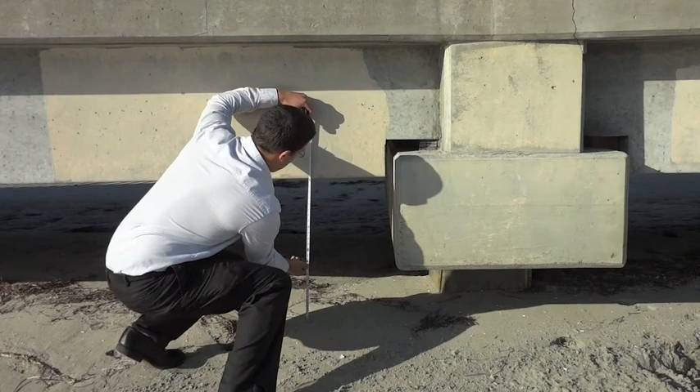Roughly 80,000 people, civilians and military personnel alike, cross the Coronado Bay Bridge on any given workday. Of that number, an estimated 34.5 thousand are military personnel entering NASNI. The road behind me is 3rd Avenue, the main arterial into the base.

Due to the security checkpoint on the base and the traffic signal at the intersection of 3rd and Orange, this vital artery backs up all the way onto the bridge, causing severe traffic congestion for the entire area. The level of service for this road operates at an LOS of F, where it should be operating at an LOS of C if the military personnel were off. This is the primary reason why a new connection must be built, to alleviate the congestion on the island and give this quiet city back to its people.

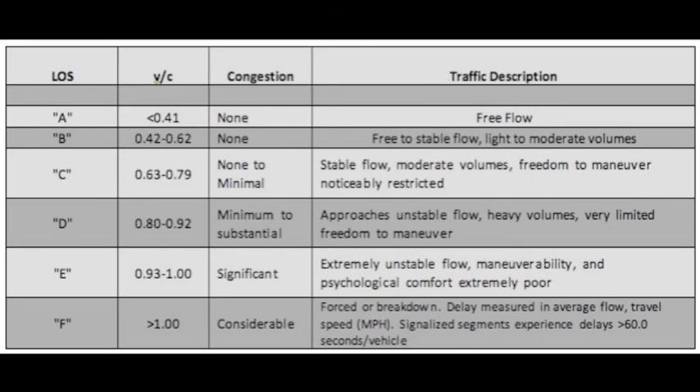After examining all of the surrounding issues and the traffic concerns for several locations, our team has determined that a tunnel design would satisfy all the needs at the expense of a larger price tag. The tunnel will be roughly 15,000 linear feet and will begin at Washington Street, right here, adjacent to the 5.

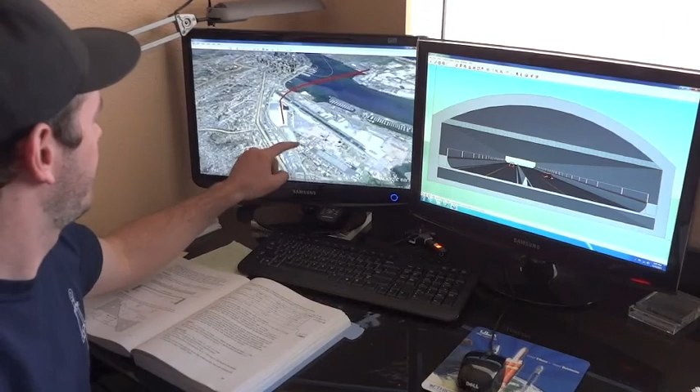It will then travel underneath Lindbergh Field on the landing strip and will travel underneath the bay along this path, coming up parallel on Rogers Street at the intersection of 282 and Rogers Street.

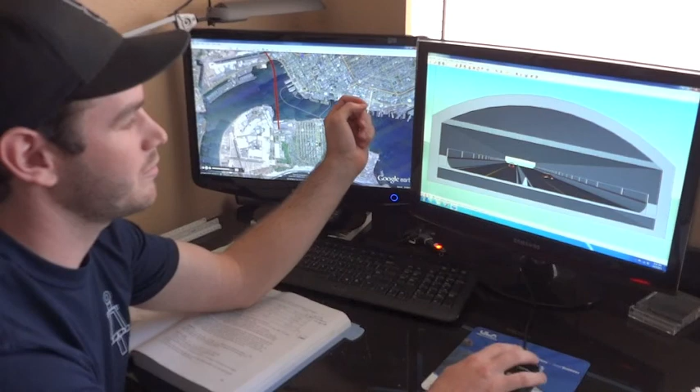The NASNI cross-section will consist of 5 lanes and will be 89 feet wide, with a type 60 concrete barrier in the center, 2-foot shoulder offsets, 3 lanes going to the base and 2 lanes coming from the base. There will also be an emergency egress of 3.5 feet on each side, and then 4-foot walls on the outer edge.

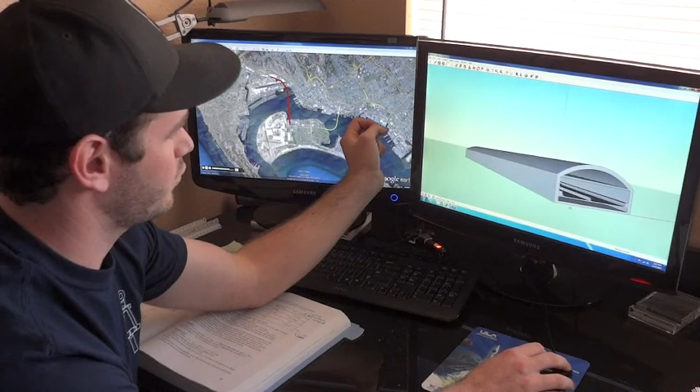This is one segment of the tunnel, and each segment will be roughly 300 to 500 feet long.

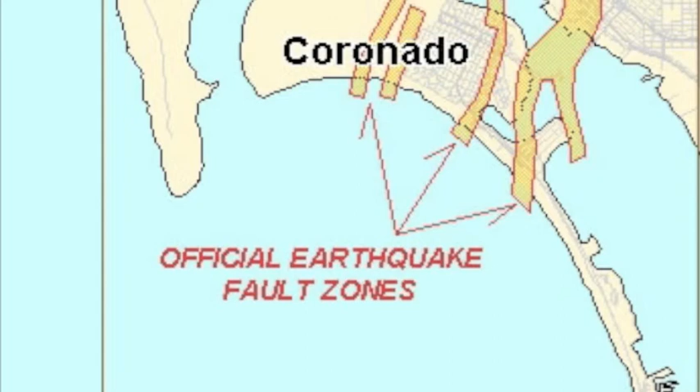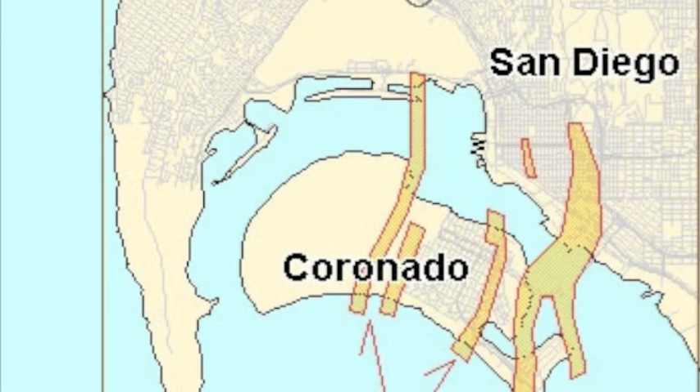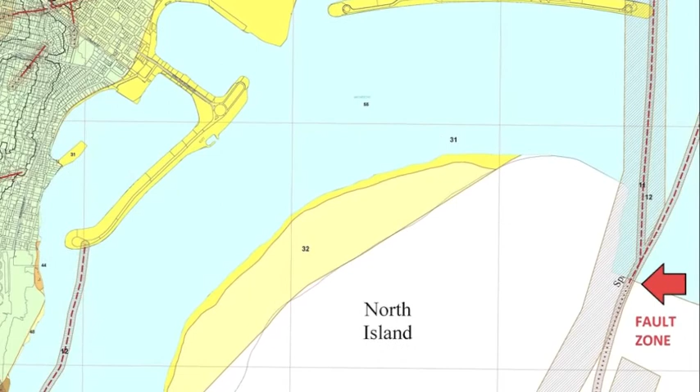Geotechnical constraints of the proposed NASNI tunnel connection mainly arise from the geologic setting of Coronado Island. As you can see in this figure, several earthquake zones cross through Coronado Island at many locations. Specifically, there is the Spanish Bight segment of the Rose Canyon Fault running approximately just west of the tunnel location on the NASNI site, as well as an active fault zone that terminates approximately 200 feet south of the site, designated by the shaded area shown in the figure.

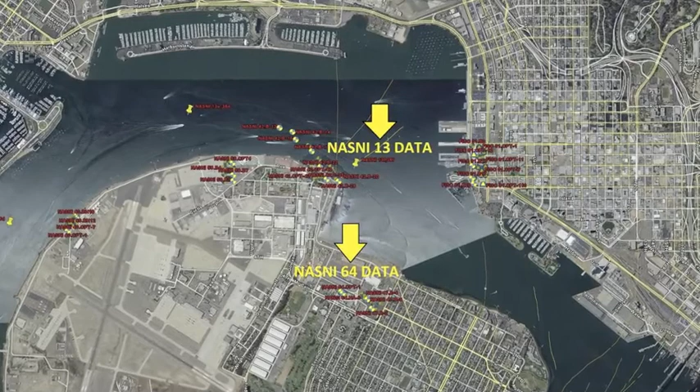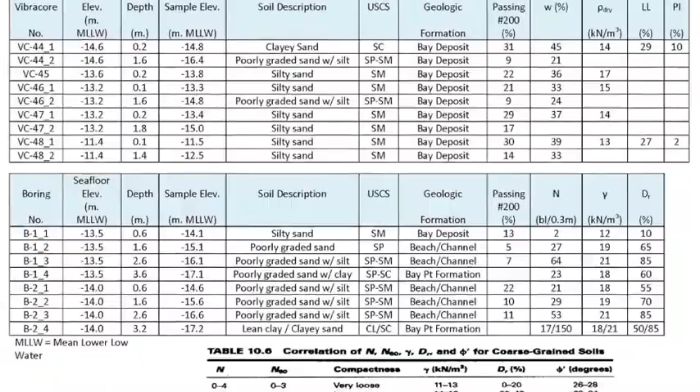The bay soil was collected from the NASNI 13 site by means of several vibrocores and borings. The bay deposits varied from silty to clayey sands and poorly graded fine to coarse sand with abundant shell fragments. A summary of the NASNI 13 soil parameters can be seen in this table.

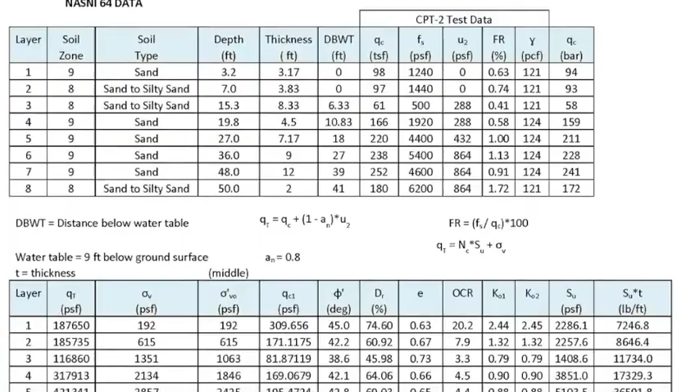The NASNI 64 soil data was collected by means of a cone penetration test sounding to a depth of 50 feet. The soil was typically poorly graded sand to silty sand, and a summary of the parameters used can be seen in this table and in the following chart.

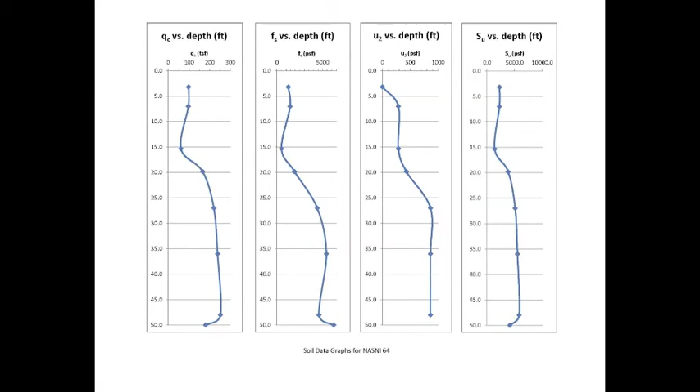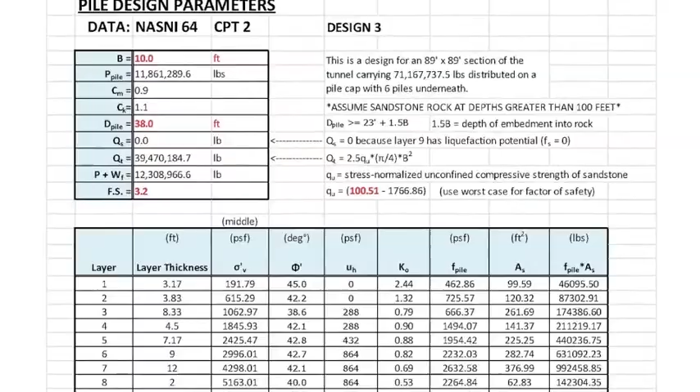The purpose of the hydraulic design is to provide a dry tunnel. Apart from the obvious safety considerations, a dry tunnel has aesthetic value which is important to users. A leaking tunnel incites discomfort within users, making waterproofing and an adequate drainage system a high priority.

The waterproofing system was implemented to prevent groundwater inflow into the tunnel. The general allowable groundwater infiltration for tunnels is 0.002 gallons per square foot per day. However, with an external watertight steel lining or membrane on the outside of the tunnel, it will prevent groundwater intrusion entirely. It will cover the entire tunnel perimeter and be 1/4 of an inch thick, comprised of galvanized steel for corrosion protection.

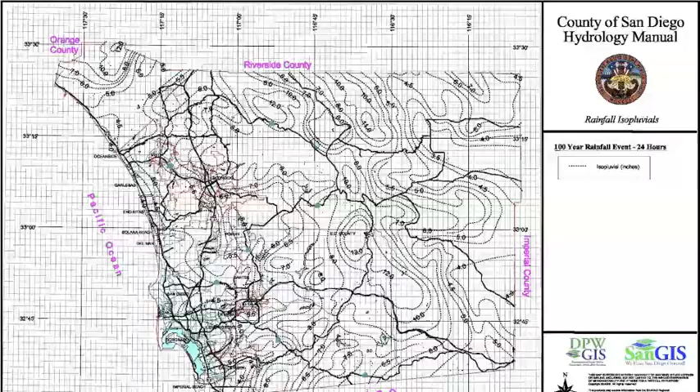The specific location of concern that was studied was the long-term parking lot now resting on Lindbergh Field. This location is where the tunnel entrance leading to NASNI would begin. It is also upstream of the tunnel, making it a key point of interest.

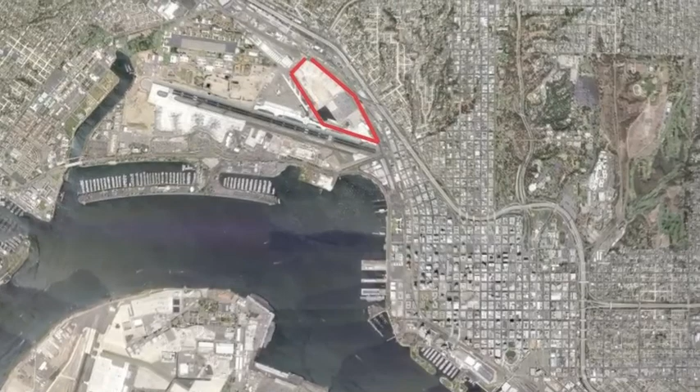The lowest point of our tunnel is located at station 106 plus 51, at an elevation of 71.7 feet below water surface level on the roadway. This point is closest to the NASNI side of San Diego Bay, and therefore our discharge point will be located there. Prior to discharge into the bay, the drainage water will go through a system of pumps and an oil-water separator to preserve the environmental standards of San Diego Bay.

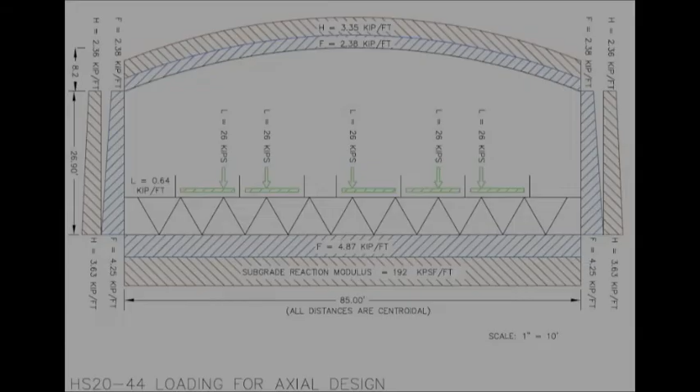Structural design of the tunnel began initially with a rectangular reinforced concrete tunnel and mid-span supporting wall off-center to align with the roadway median. External loads were calculated to be greatest at station 62 plus 00 of the tunnel, the deepest point below soil before crossing the bay shore.

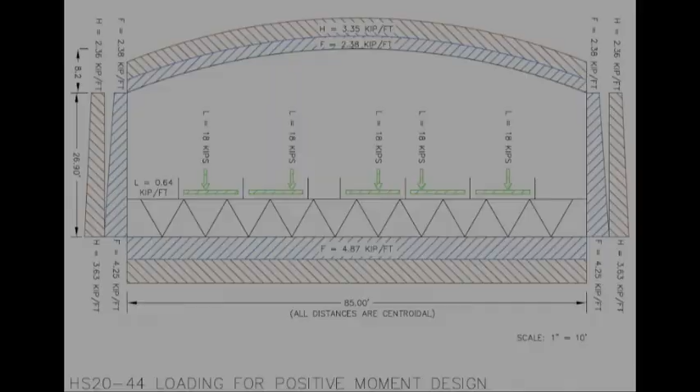Load resistance factor design was used for this tunnel. The worst case load combination was found to be the ASCE7 load combination 2, with dead and fluid loads multiplied by a factor of 1.2 and soil and live loads multiplied by a factor of 1.6. All external loads were applied to the rectangular tunnel in a structural analysis computer program. This yielded an unacceptably high bending moment in the tunnel top, even with the mid-span wall.

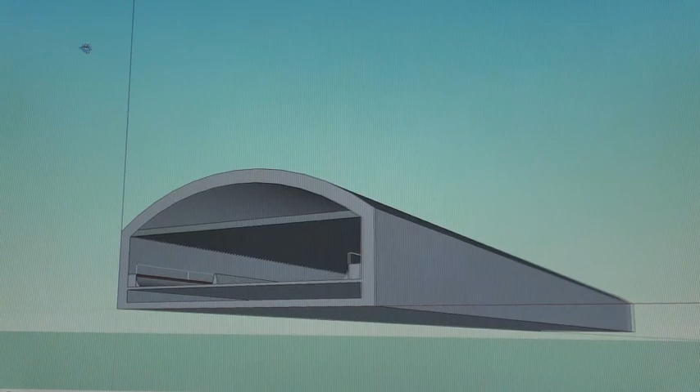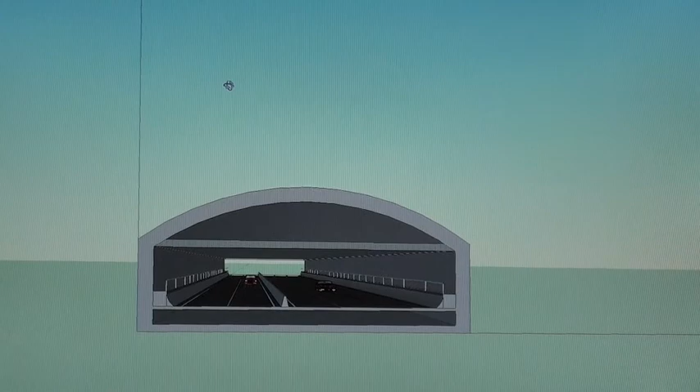Tunnel design began again with elliptical compression arches of varying peak heights and no mid-span supporting wall. This not only created a more open tunnel interior, but a large reduction in induced bending moment upon the tunnel top. An arch of 7 feet high reduced bending moment by 42.6% and was selected for further design, as it provided the best compromise between bending moment reduction and a prohibitively large tunnel exterior height.

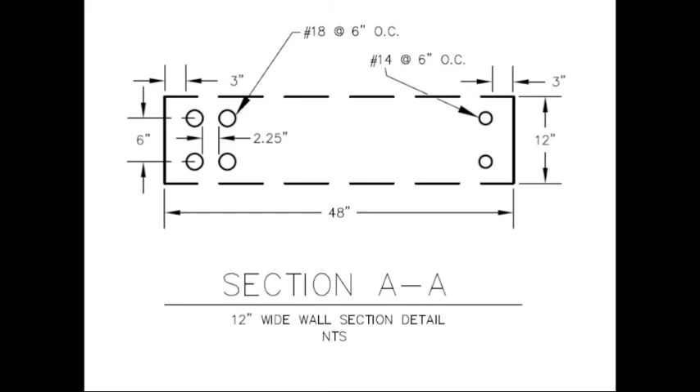With the compression arch size selected, a live load per Caltrans HS20-44 was applied on the roadway, in addition to the external hydrostatic, soil, and buoyancy loads. Soil support was modeled as springs, with a spring coefficient equivalent to the soil's modulus of subgrade reaction. This live load was moved until peak placement was found for maximum axial, shear, and bending moment of each tunnel member. The comprehensive analysis yielded the superior and cost-effective tunnel section shown here.

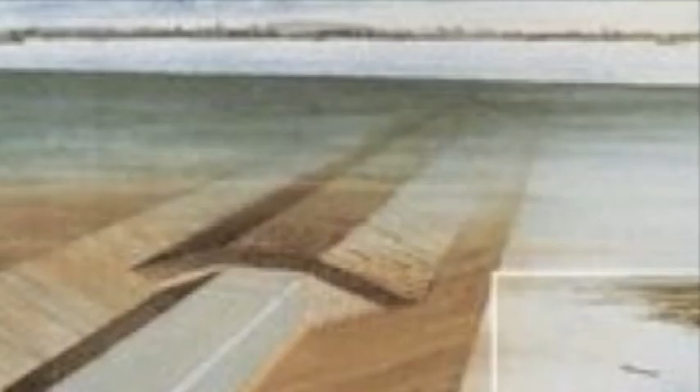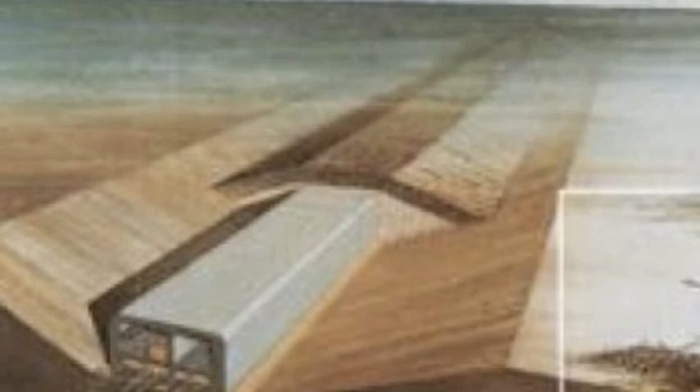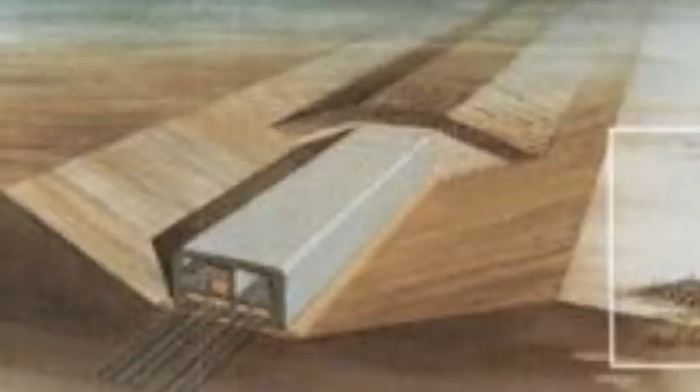The cross-section and dimensions of the tunnel will remain constant throughout the complete system. However, the means of construction for the different elements will vary slightly. Immersed tube tunnels can typically be found in two forms, either steel or concrete tunnels.

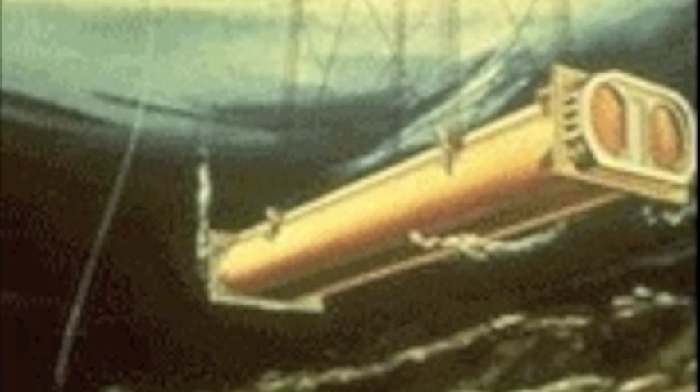Both types of tunnel perform the same functions after installation. However, the means of fabrication and immersion for each is where they differ. For purpose of this project, Prestige Worldwide proposes the use of precast concrete tunnel sections.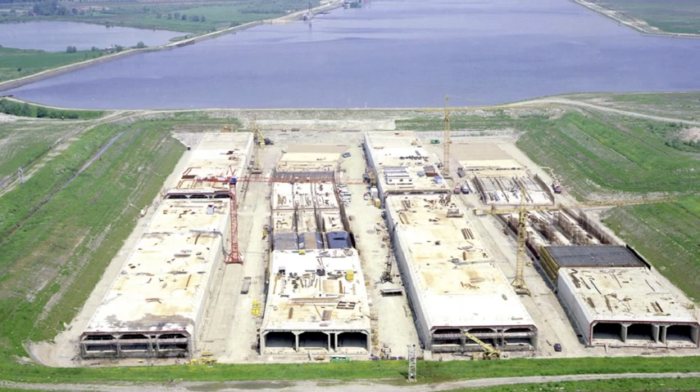These concrete tunnels are usually precast completely on land using steel reinforcing rebar. The casting will take place in dry docks or specially built basins from where the tunnels will be floated to their final positions and lowered into the dredged trench.

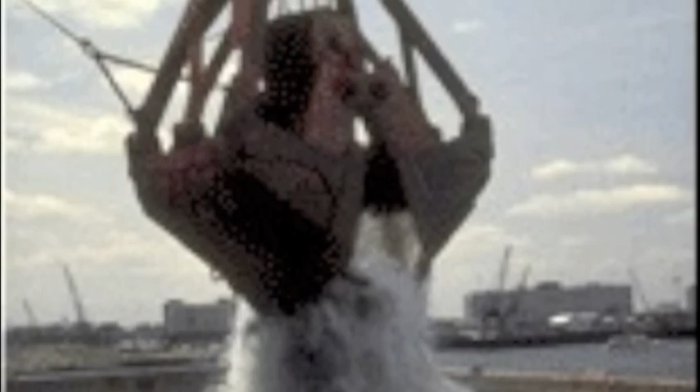The construction process of an immersed tunnel consists of a number of significant processes. The initial stage includes excavation of an open trench within the bed of the body of water being crossed by means of dredging. While dredging is occurring, the individual tunnel elements, roughly 300 to 400 feet in length, will be fabricated off-site, usually at a shipyard or in dry docks.

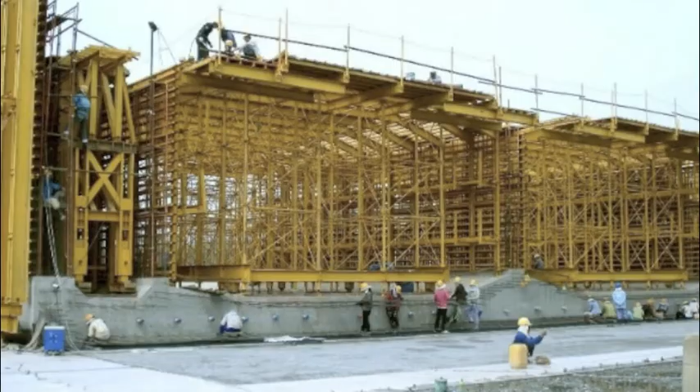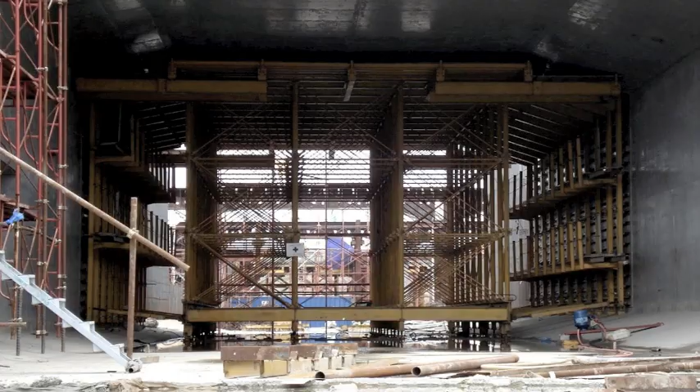These elements are fabricated from the bottom up, starting with the base, continuing with the walls, and finishing with the top of the structure. Each portion is constructed initially with outer forms and the rebar skeleton that will help reinforce the concrete. The concrete is then poured and allowed to settle before additional portions of the tunnels are fabricated.

To account for the need of an airtight connection between tunnel elements, the ends of each element are closed by bulkheads, which are set back a nominal distance from the end of the element. This creates a small space at the ends of the adjoining sections that is filled with water and will require dewatering after the connection with the previous element is made.

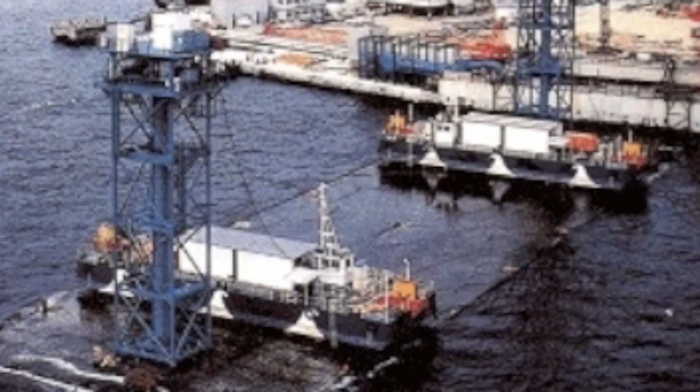After fabrication and launching, the elements are towed into position over the excavated trench in their relative final positions. Once positioned and attached to a lowering device, ballast is placed in or on the element so that it can be lowered to its final position.

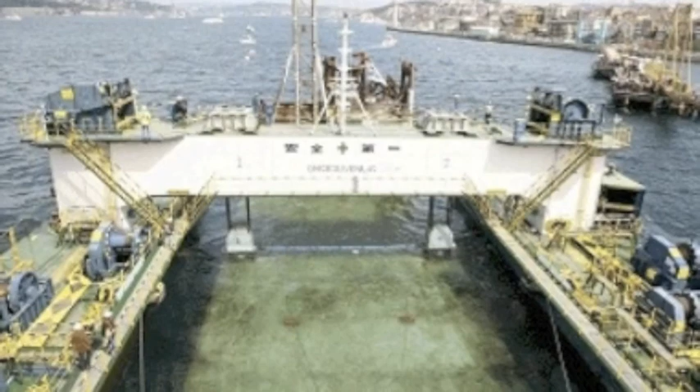For precast concrete tunnel elements, the typical ballast method used is that of a temporary water ballast. After placing the element in its position, connection is made between the newly placed element and the end face of the previously placed element or structure to which it is to be joined.

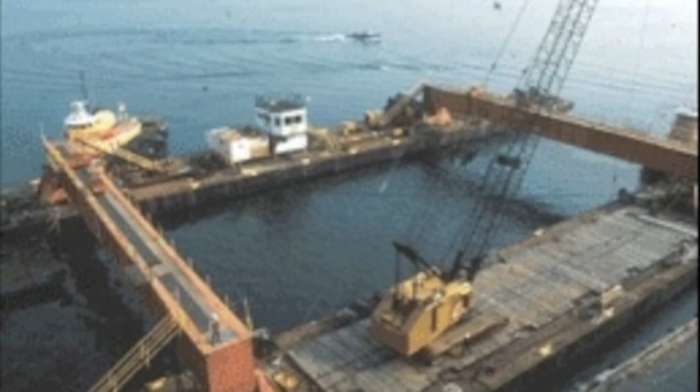Once the element is in its final position, butted up against the adjacent element, the water within the joint between two elements is pumped out. After locking fill is in place, the joint can be completed in the area made watertight.

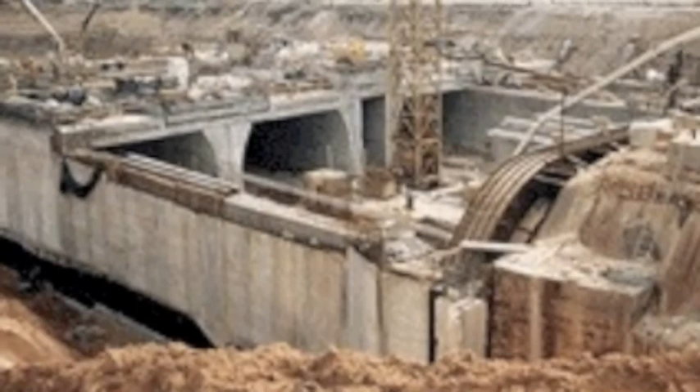The landside portion of the Nasny Tunnel project will be constructed with identical tunnel elements as those used in the immersed tube section. However, the overall construction process differs slightly.

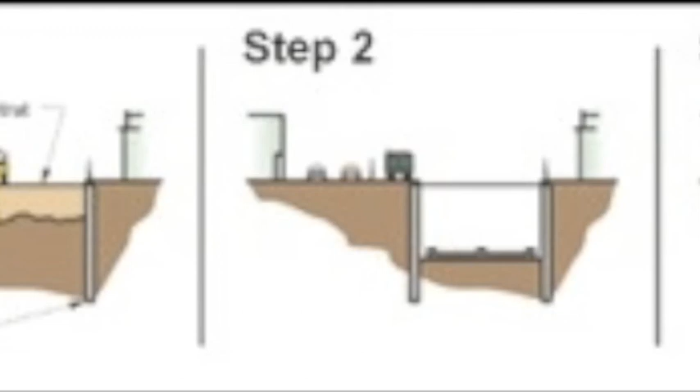Prestige Worldwide will utilize the common process known as the cut and cover method during the landside construction of the tunnel. In a cut and cover tunnel, the structure is built inside an excavation and covered over with backfill material when construction of the structure is complete.

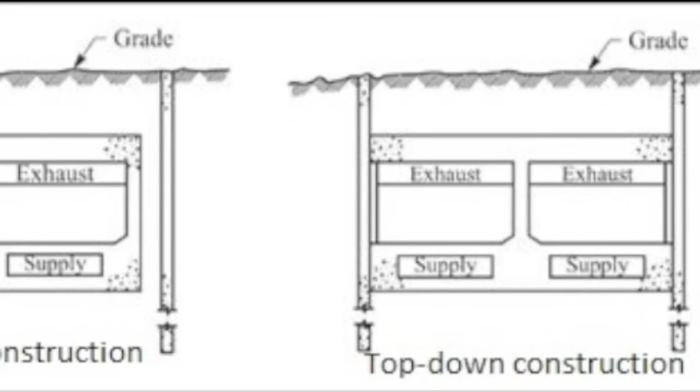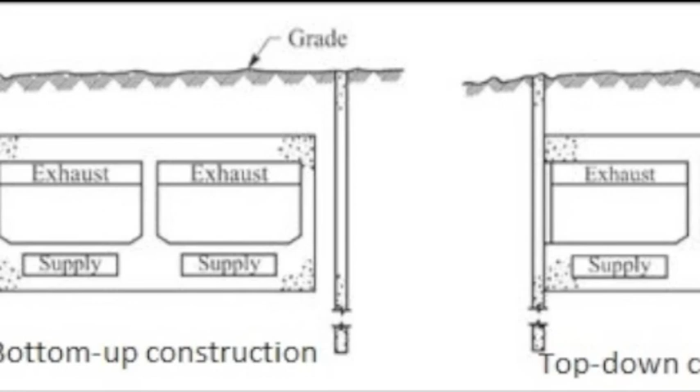Two types of construction are employed to build cut and cover tunnels: bottom up and top down. For this project, Prestige Worldwide will implement the bottom-up construction method, utilizing the open-cut excavation process. To account for slope stability, the open-cut method slopes the sides of the excavation away from the trench to meet the adjacent existing ground line. This method is more cost-effective and also helps reduce the time frame for the project schedule.

The Nasny Tunnel facility will satisfy all of the needs of both the military and the public without disrupting the iconic San Diego skyline or air traffic from Lindbergh Field. This facility will be state-of-the-art, putting San Diego on the map as the best city, making it everyone's perfect city.